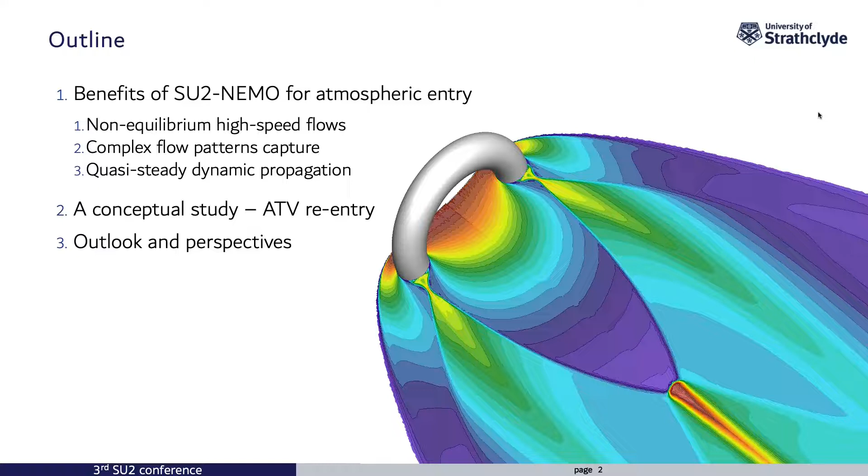So the simulation of the atmospheric reentry problem is a difficult task because it's an unsteady, high speed and multidisciplinary problem. We have a low number of relevant flight test data to validate, and it's also difficult to make the experiments on ground. And most of the state-of-the-art tools use surrogate or engineering models to compute their thermal loads and the structural stress, but this can lead to wrong results because they do not account for the complex flow features, such as shock interference patterns and shock impingement. And this can have an impact on the dynamics of the objects, and also on the overall demise and fragmentation process of the objects during the reentry.

So to address this accuracy issue, we can use SU2-NEMO to aid our computations and simulations. For those who don't know, SU2-NEMO is a solver that was branched from the standard SU2, but it accounts for finite rate chemistry and for thermal non-equilibrium by using the 2-temperature model by Park. We also performed the linkage between SU2-NEMO and the Mutation++ library, developed at the von Karman Institute, which allows us to compute custom mixtures, not only air. This library provides us with the thermodynamics, the kinetics, and the transport properties of the different species that we want to consider in our flow.

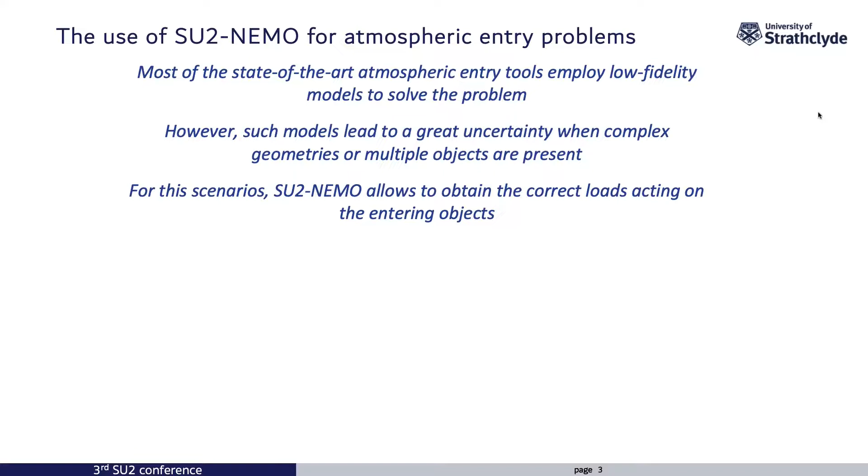So, long story short, we can use SU2-NEMO to account for high enthalpy flows with mixtures that can be different than air. For instance, we can try to simulate not only Earth entry, but also Mars or Neptune entry. And we can also account for chemical and thermal non-equilibrium, so account for the chemistry that occurs in the flow.

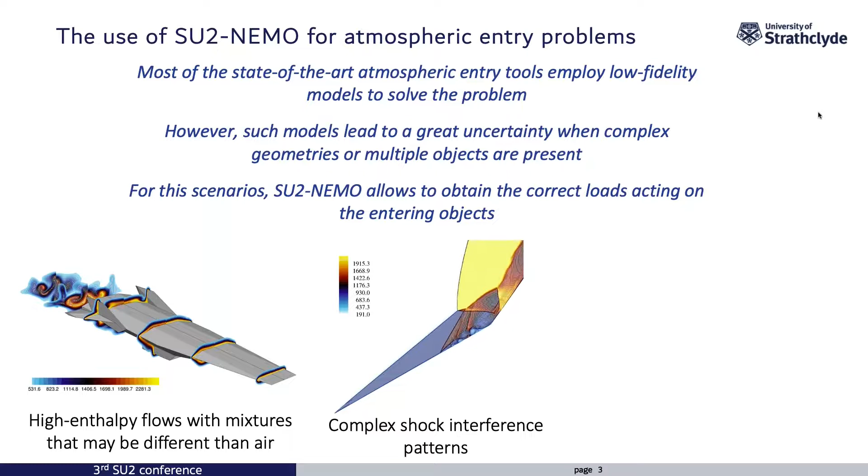We can also use SU2-NEMO along with a mesh adaptation tool to try to capture the complex flow features that can appear due to the complex geometries that we are simulating, or due to the presence of multiple objects that are next to each other. And by integrating SU2-NEMO into an external framework that has been developed for the purpose of atmospheric reentry problems, which I'll discuss further in the next slides, we can also use SU2-NEMO to give us a more accurate dynamic propagation when we have multiple body simulations.

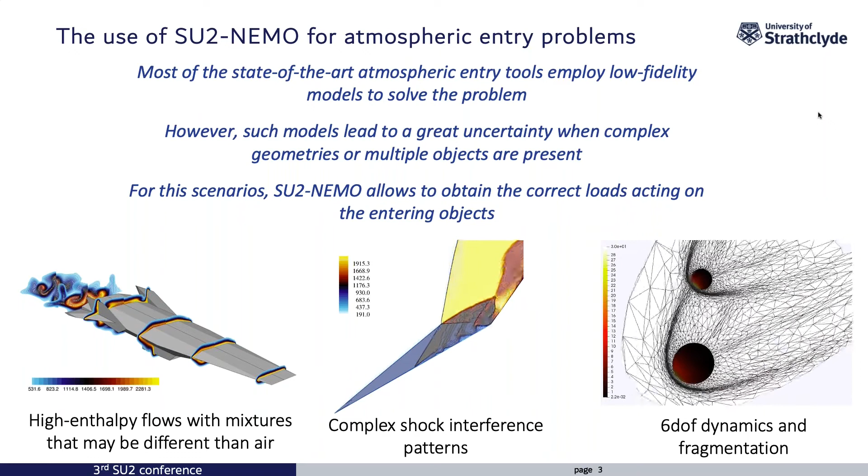So to assess the computational accuracy of NEMO when there are non-equilibrium chemical processes occurring, we have conducted the HYNECC case, which consists of a hypersonic flow of around Mach 9 over a single cylinder, using the parameters that you can see in the table on the slide. We adapted the mesh 2 times in order to obtain a grid converged solution, using the metric-based anisotropic mesh adaptation tool called AMG, which was developed at INRIA.

And this allows us to obtain stretched elements on the location of the highly directional flow features in order to try to capture them better.

On the top of the slides, I present the pressure and the heat flux profiles. So pressure at the left and heat flux on the right, and the results obtained with SU2-NEMO are in orange. So on the left, we can see that we are pretty much matching the experimental data, while on the right, we are under-predicting the experimental data because for this case we assumed a non-catalytic wall, although we are still matching the other simulations that also assume non-catalytic walls, such as the simulations of Nompelis or of Andrea Lani.

And also further validation of SU2-NEMO has been done by our working group, such as Jacob Needels, who has already implemented the boundary wall to account for catalycity, but I still need to rerun this case to account for that boundary condition. And also the work of Wally. And more works can be found in the literature that I'll provide at the end of this presentation.

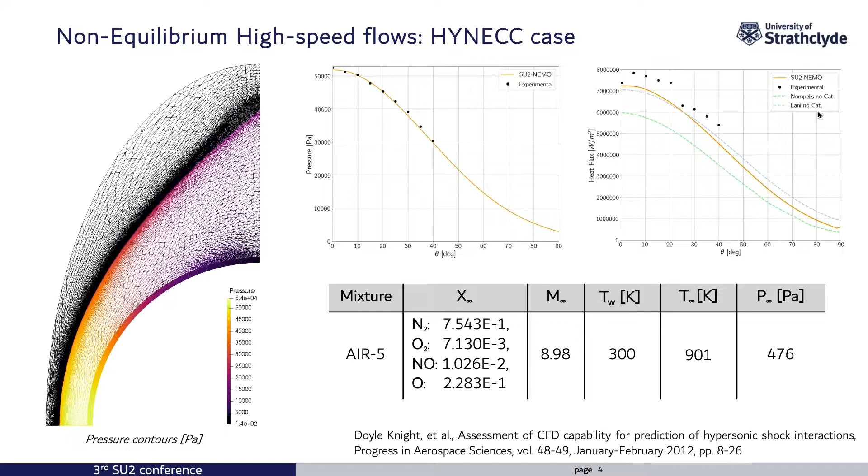So now to assess how well SU2-NEMO can capture the complex flow features, we have conducted this two-sphere case. Shock interaction is an important phenomenon to capture because it can have a huge impact on reentry simulations, because the interaction can lead to highly localized pressure and thermal loads on the downstream sphere in this instance, that will then affect the overall dynamics and also the demise process. So for this case, the shock interference will occur due to the positioning of the spheres for a Mach 7 flow.

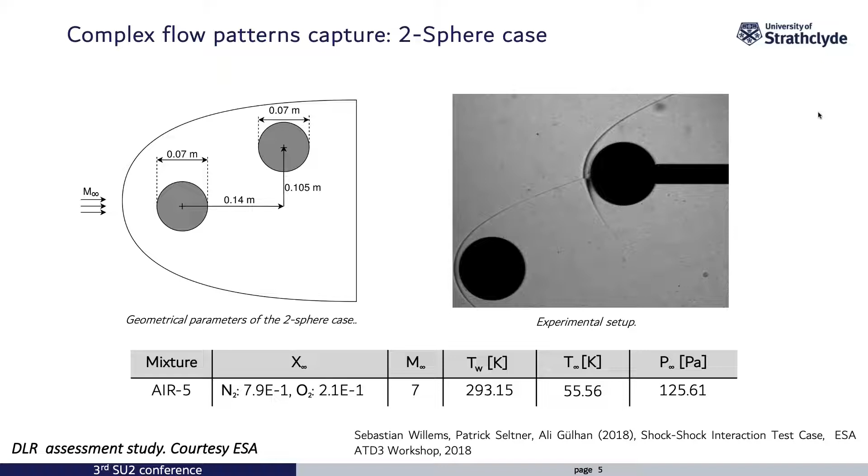To achieve a grid converged solution, we performed 3 adaptation levels. You can see on the top left GIF, using the same tool AMG to capture the directional flow features and try to get more detail regarding the shock interaction pattern that occurs next to the most downstream sphere. And on the bottom left, you can see the pressure contours for the different levels of the grid, as we obtain a grid converged solution. You can also see that the peak is due to the influence of the shock impingement on the secondary sphere.

Then on the right, I give an overview of the Schlieren images. So I compared the experimental Schlieren against the numerical Schlieren obtained using SU2-NEMO, and the numerical Schlieren is the one with the green color, and we are matching pretty well the experimental data, which gives us more confidence in the results that we got with NEMO.

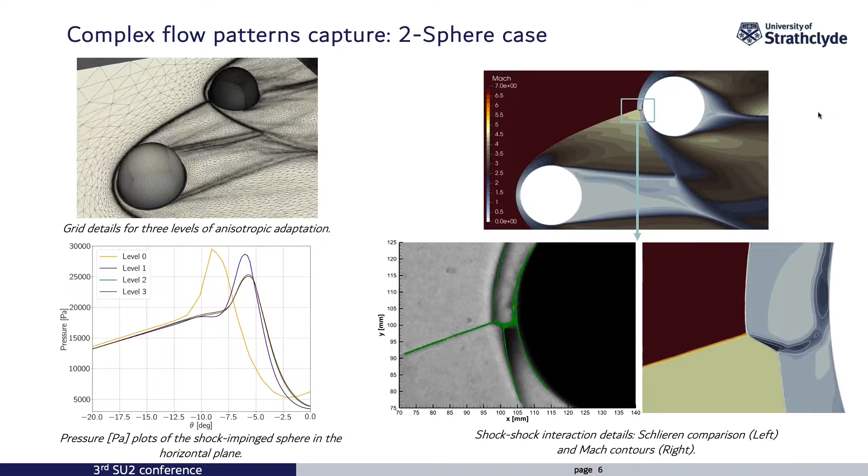Then SU2-NEMO is also an essential tool for us to analyze the fragment dispersion due to the shock interference, because it cannot be captured using low fidelity models. So to demonstrate this aspect, we analyze the dynamics of this shock impinged ring. So this ring is basically impinged by the shock which is generated by the cylinder, as you can see on the top left schematic, which was the experimental schematic used for this test case. It was run at the von Karman Institute.

So the ring was placed upstream of the cylinder, held using a thin wire that ruptures after the startup of the flow at around 3.8 milliseconds. And we have the experimental data available from that time until 30 milliseconds, but we only simulated until 11.4. And in this time window, we can see the free stream flow at the bottom left, which is unsteady.

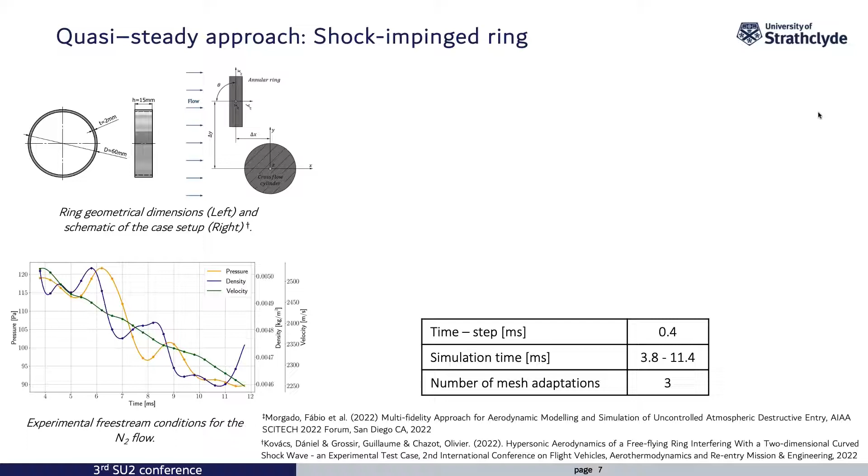So to increase the accuracy in the dynamics, we have integrated SU2-NEMO into a framework called Titan. Titan stands for Transatmospheric Flight Simulation, and is basically an external framework that we developed in Python to try to address these reentry problems in a multi-fidelity manner. Titan uses a quasi-steady approach, and this means that when you give a time window, we split that time window into several intervals, and for each interval, we consider a steady state of the flow. So for each interval, we run the flow, we compute the loads, and then we propagate in time using Titan.

So as you can see on the flow chart, Titan is able to generate the mesh using an automatic mesh generation tool such as Gmsh. We provide the mesh to SU2-NEMO, which then proceeds with the simulation, and we proceed with the grid adaptation until grid convergence is achieved. And then we can compute the forces, and then Titan propagates the solution in time to compute the dynamics.

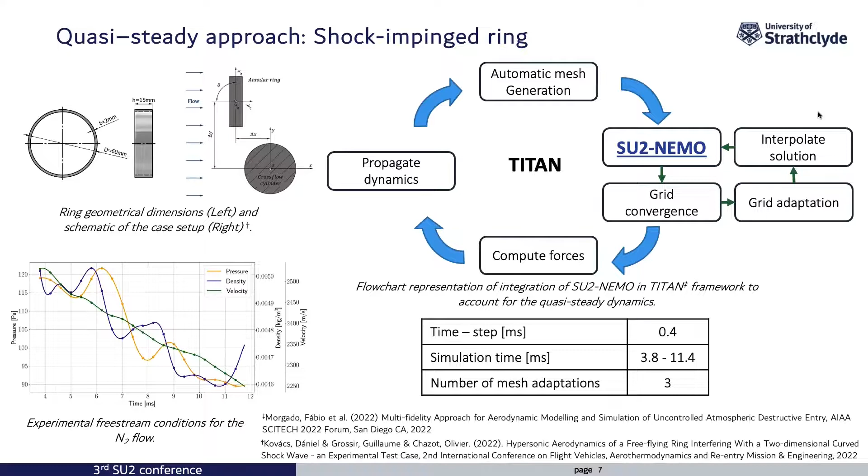And then more information about Titan and also regarding this test case can be found in the literature at the bottom of this slide. So these are the results that we obtained.

On the top left, on the top plot, we check respectively the X position of the ring comparing the experimental and the numerical. In the middle, the Y position, and on the right, we compare the angle of attack. And you can see that we are matching quite closely the experimental data, having a maximum error for the X position of 0.6 millimeters, for the Y position of 1.2 millimeters, and for the angle of only 0.2 degrees.

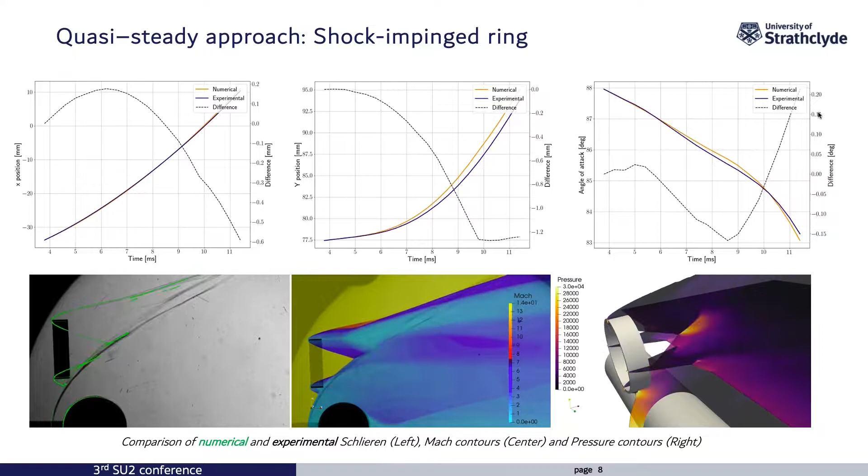Then for the bottom left, the GIF compares the numerical and the experimental Schlieren, and we are still relatively close to the experimental data. For the middle, I just plotted the Mach contours, and for the right, I have the pressure contours of this case.

Then for this final case, I want to present this ATV simulation that was provided to us by ESA, basically to highlight the role of SU2-NEMO in simulations of atmospheric re-entry when coupled within this Titan framework. In this case, we have to address all three aspects that I've been referring to in this presentation simultaneously.

So the initial conditions are that we want to run at an altitude of 120 kilometers with a relative speed of 7.5 kilometers per second, which corresponds to around Mach 28, a flight path angle of minus 1.5 degrees, and an initial pitch so that our satellite can rotate at 10 degrees per second.

Now, we also assume that at 92 kilometers, we are going to trigger a fragmentation of the main joints connecting the main body and the solar arrays, as you can see in the left figure. We are only going to use SU2-NEMO when we have multiple objects. So between 120 kilometers and 90 kilometers, we're going to use Titan. After that, we're going to use SU2-NEMO because we already have multiple objects, and we want to assess the interference between the different objects and the shock waves generated by them.

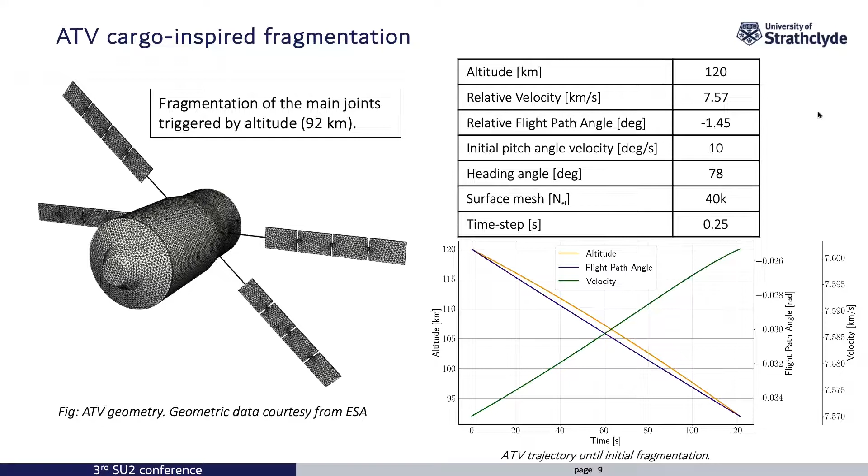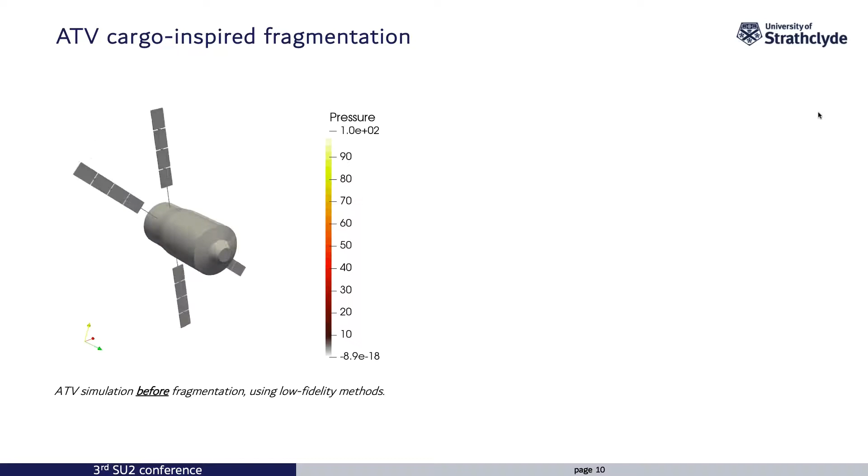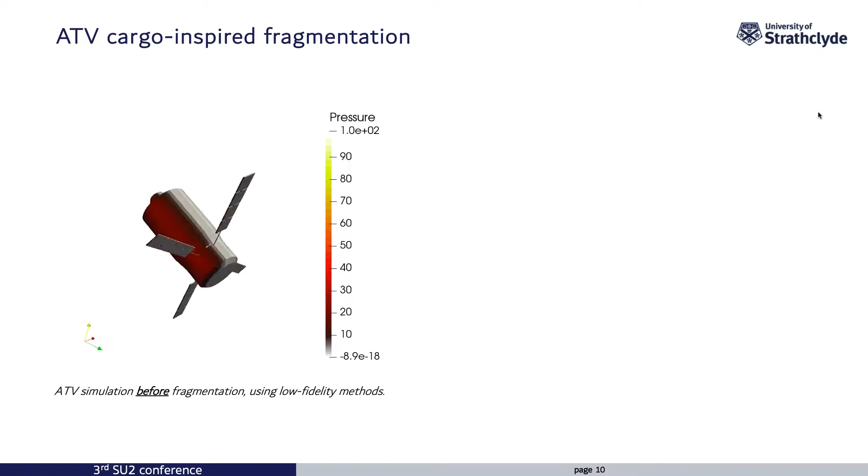Then the bottom right plot shows the trajectory for this window of 120 kilometers to 90 kilometers that was computed by Titan. Titan in this time window uses a low fidelity approach, based on the modified Newtonian theory, to compute the pressure loads. On the left, it shows the dynamics from a time step of 0.25 seconds up to fragmentation. You can see the pressure, but you can also see the back-face culling occurring, which is when the body is hidden from the flow because of the panels.

And then on the right, I show our simulation with NEMO, and for the moment it's still an ongoing simulation. I just have 5 time steps. But this is basically what SU2-NEMO integrated with our framework can do: assess the dynamics of the different objects individually, and you can already see on the bottom right panel there's already some influence from the shock wave, captured using SU2-NEMO, that's affecting the dynamics of that bottom right panel.

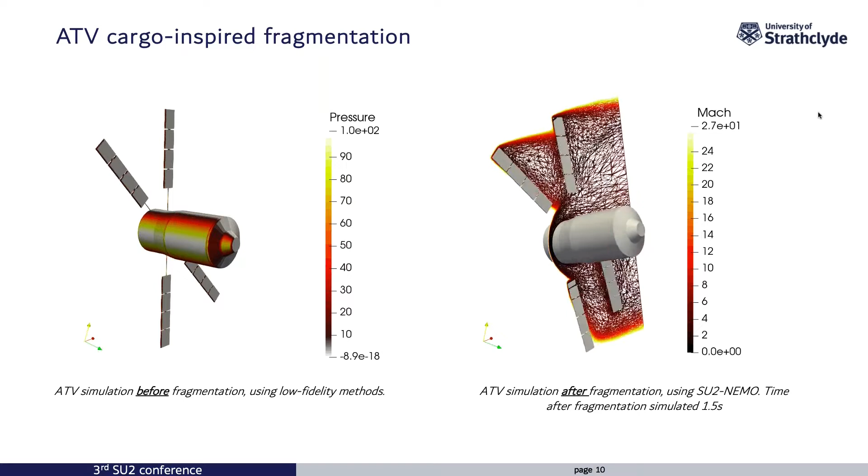So let's just give a few perspectives. We can use SU2-NEMO for the 3 topics discussed in this presentation, such as to compute the physics of high enthalpy flows, accounting for the chemistry and thermal non-equilibrium. When coupled with mesh adaptation, we can capture the complex shock patterns that can have an impact on the dynamics and on the demise process. And we can also increase the fidelity of our atmospheric re-entry tools by using Titan, which is basically a multi-fidelity method that tries to improve the confidence in the state-of-the-art tools that exist.

As a roadmap of SU2-NEMO regarding this kind of problems, we just want to increase the robustness of the codes, so we can basically run SU2-NEMO on Titan without manually setting up the things, so fully automatic.

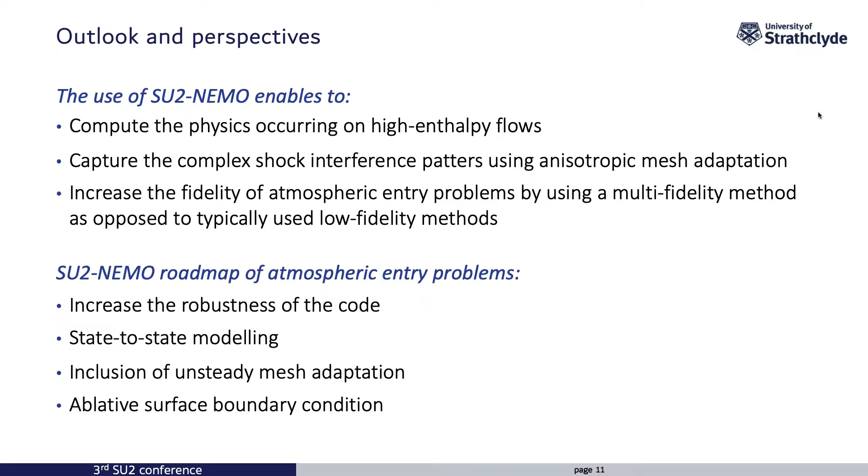We want to go for state-to-state modeling to improve the chemistry going on. To include the unsteady mesh adaptation, so we can not only use the quasi-steady approach we are using, but also account for the unsteadiness of the flow. And then to go for ablative surface boundary conditions, so we can also account for ablation of the material.